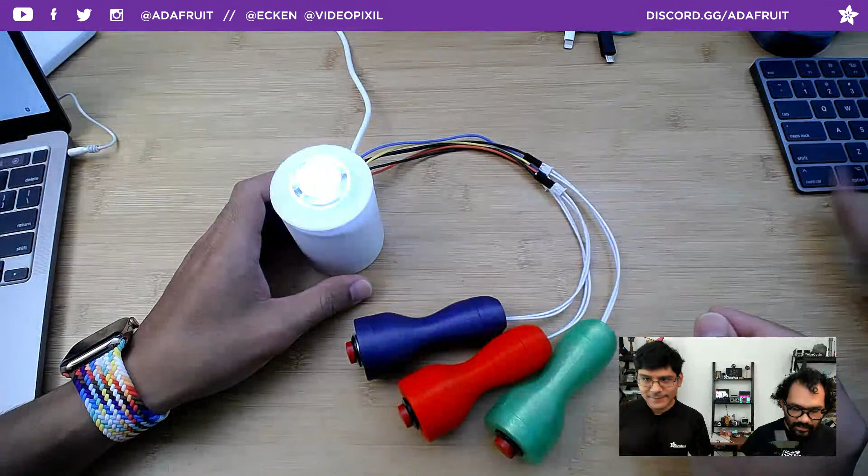And here's the parts. We showed this off a couple weeks now, and finally released last week. We got the guide and the video out, and we're just going to go through the guide as quick as we can on all this. So this is really good for setting up trivia now that everybody can be face-to-face.

A lot of game opportunities now are arising, and this is the Circuit Playground Bluefruit, having all these button inputs so you can see which player chimes in first. It'll just light up to the color of whatever you set up on your little buzzer handle.

All 3D printed, nice little handle that Noe designed for this. This is a 3-part, little twisty on, completely modular, so you can change out any of the panel buttons or the construction itself. Take a look on the inside of this.

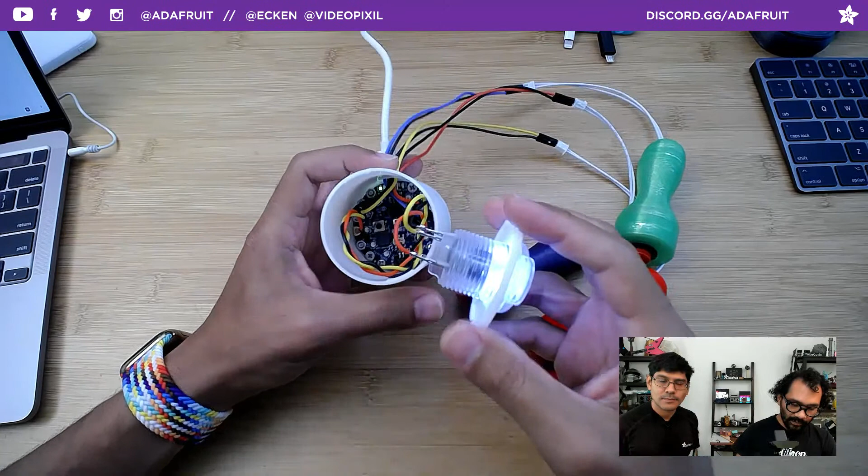There's a Circuit Playground Bluefruit. We're using the bolt-on system, so it's excellent for education if you want to reuse this project for different projects, or reuse the parts for different projects. So all snap-fit together parts.

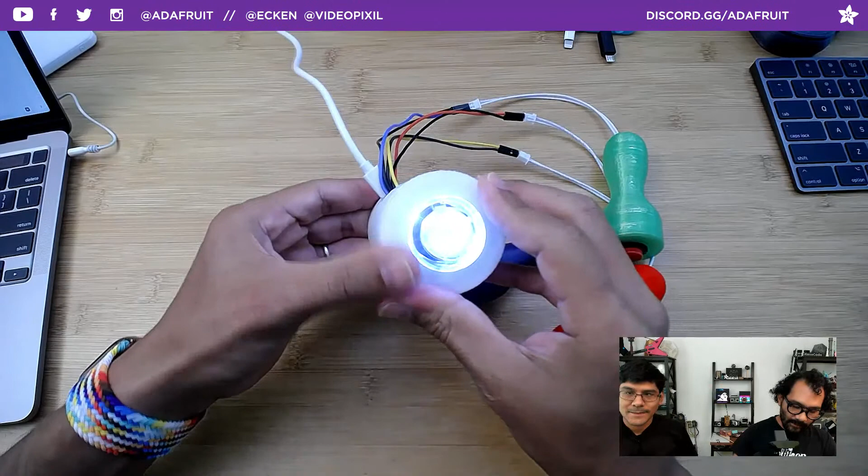These little lids, little tabs here just snap into each other - very nice little satisfying click on that. And then on the bottom here we have our STEMMA speaker with our nice little themed grill to Adafruit, little stars. All snap fits together as well, except for the little mounts that you have to use to sort of secure everything back together.

As we were saying, it's modular, so we're using the bolt-on kit as well as these jumper cables, so you can easily extend this or shorten it if you want to be a little bit closer.

And the way that it works is that the controller, or the host, has to clear the button, so the players can't just go ahead and chime in whenever they want. So you have to clear that and allow them to actually go in and chime. Everything's written in CircuitPython, so of course you can change all the audio files, the colors, or the behavior of everything.

So let's go ahead and jump into the Learn Guide. Yeah, so check it out. Huge shout out to Dylan Herrada for spearheading the project with Lamar - they collaborated together on figuring out how to make this work.

Here's a list of the parts and the 3D printed files that you'll need for this. Like we were saying before, again, it's all completely modular, so it's a very nice way to set up a project like that.

And surprise, everything is in stock for this. Usually isn't - I don't say usually isn't. Well, I mean, it's a good problem to have. It is. Okay, cool. Well, excellent.

Now all the parts are from Adafruit, so including all of the little cables and even the bolt-on kit, it's all available through Adafruit, so that's really nice to see. Normally you have to get all these little bits and bobs from other places, but it's nice that everything's here in the shop.

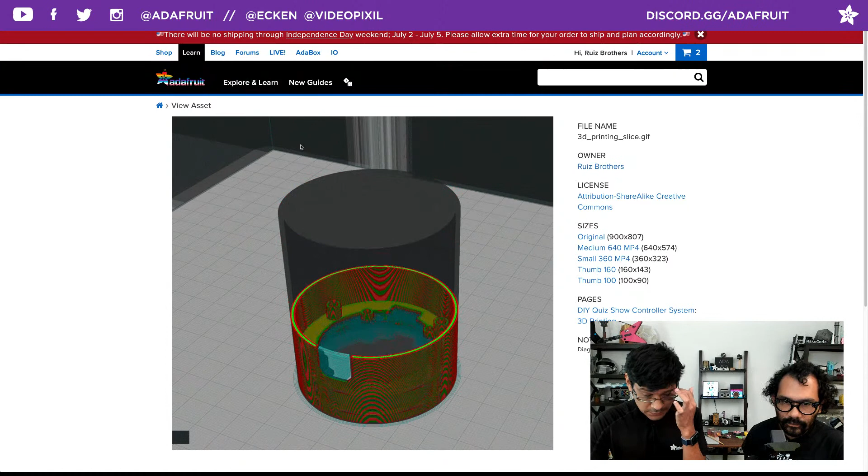This is just a time lapse little GIF. I'm showing when I'm previewing the Learn Guide, I have the autoplay GIFs turned off just to save on processing, but it should automatically play on your end. So this shows you way more than just a single screenshot, like how the layering is supposed to be for the supports.

That's the main thing I'm showing here, how the supports are all set up. You have your low density, a smaller extrusion width, and then a little bit of a Z gap, just to make that very easy to remove.

They are listed right here, all the different support extrusion width, the density. Run through that. If you haven't set up supports yet, this is definitely a good reference point. And then save it as your main profile, and you can save it out as a profile too.

Let's go ahead and jump into the circuit diagram for this. Okay, prototype this using the alligator clips. After that, you can jump into more permanently, or semi-permanently, attaching these with the bolt-on kits, or you can go ahead and solder it too, whatever you like.

The only special thing here is the way that we are connecting the grounds on the arcade button. Scroll up, you can see that that is actually the only thing I soldered, just to have those two connected to make it a little bit easier. Daisy chain all your grounds.

Let's go ahead and jump into the assembly.

So we're using the jumper cables here and flat pliers to have it bent at 90 degrees, so you can easily add it underneath the nuts that come with the bolt-on kit. Those are just wide enough to attach two of them, which you're going to have to do when you're sharing ground for all of these button connections. So you have to do this at least two times, so a little bit of patience.

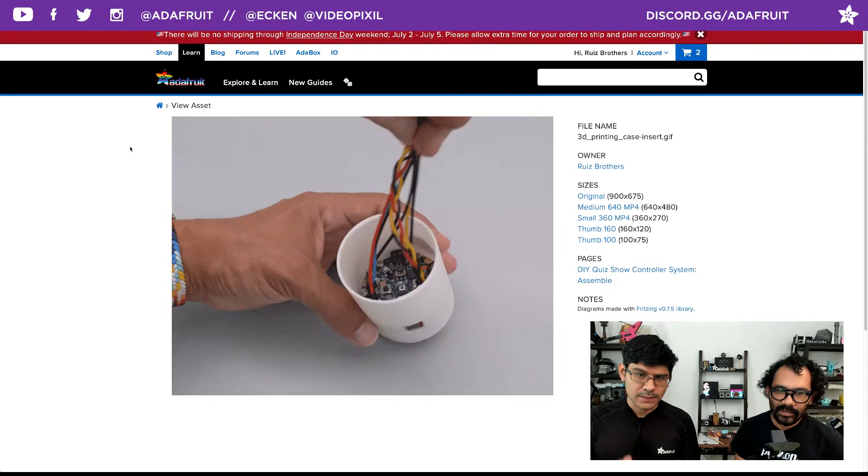Make sure your wires are not too tangled up. I did a little bit of a braid there for the controller, just so I could see which one was for that. So you just want to line up the USB port to the USB cutout on the case, super easy.

Right, so you add those additional screws. And again, that is the 3mm bolt-on kit that we have in the shop.

After you secure that down on the bottom, you'll connect the STEMMA speaker and align that. The STEMMA speaker actually has smaller mounting holes, so you're going to need the M2.5 by 6mm long screws. We do have a nylon kit that might work, but I totally suggest using the metal M2.5 screws for that, that's a good tip.

If you're ever going to do plastic on plastic screws, not maybe the best, definitely metal on plastic is a little bit better and more secure, and it won't strip your plastic screws.

The lid snap fits on there. Of course, you can edit that if you want to have a different lid design for the speaker.

The wires for all the buzzers all route through the USB port cutout, route all those out.

And then the arcade button screws onto the lid. And as we were saying before, we're just connecting the grounds to eliminate one of the cables, making it 3 to connect.

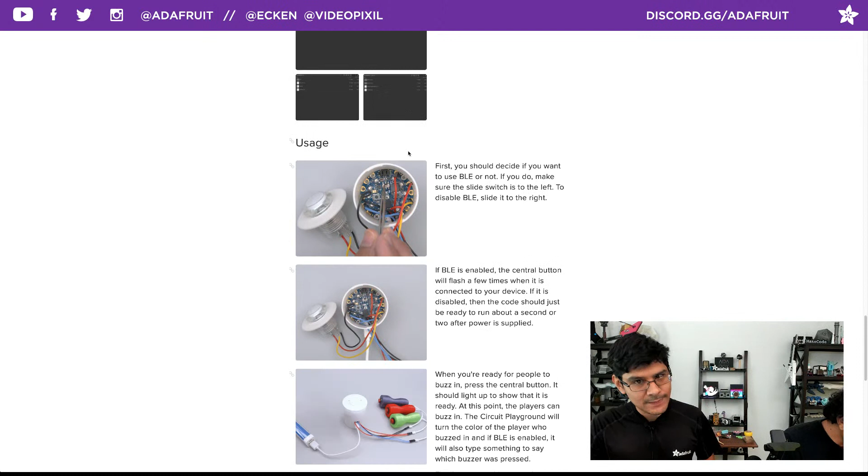So you just click that button, and you get all the files plus code. Very fun, commented really nicely, with screenshots showing what your USB CircuitPython drive should look like with these 4 libraries, plus a little usage guide on the Bluetooth. There's a little switch on there - if you don't want the Bluetooth, make sure the switch is on one position.

If you want to use Bluetooth to do HID USB keystrokes, flip the switch to the other side, and you'll connect to it with an iOS or Android device using the Bluefruit app. One thing we sort of glossed over - this can send HID commands to your computer, so if you have a game with USB HID support, you can actually have this as a wireless controller for your game.

And then in the code walkthrough, Dylan breaks down all the sections, so if you're relatively new to CircuitPython, this gives you an idea of what all the sections are doing - how to enable the speaker, all the button inputs, all the Bluetooth stuff. And here's the audio WAV file - if you want to change the file name or have it looping, you'd do that all here.

A little bit of the logic here. If you want to change the colors to reflect different colors, you'd want to do that in the if statement there. The colors are just raw RGB values using pixels.fill.

But if you wanted to use the CircuitPython LED animation library, you could easily integrate some of the animations so you can do animations instead of just solid colors. We wanted to be pretty minimal, so that's why we have these solid colors, but you can go in there and modify it so it can be super rad with cool colors and different sound effects for each player.

Along with that, we have a model for the RP2040 Trinkey. This is what it looks like. We just took the Eagle file from Limor and turned it into a 3D model with Fusion 360.

If you want the link, Pedro, it's on the GitHub repo. So the GitHub repo has this 3D model. Here's my GitHub repo, so you can check that out. Super visually stunning, I know - look at that huge, visually stunning list of parts.

Yeah, so we got the link for the GitHub? I do not, that's what I'm looking for. GitHub, I was looking for this part actually. If you haven't starred it yet, you can star it so you can see whenever I upload new stuff, and I have some other stuff to share. But yeah, that's the RP2040 Trinkey, got a 3D model out there.

I also made sure that the PCB is the right thickness - it's 2 millimeters, a little bit thicker than your normal 1.6. But anyway, back over to what you're prototyping.

This is an early one, a fun little keypad. It's a 4-button keypad in the shape of a kitty paw, with a display in the center. This is a collab project with Liz, Party Parrots. The idea is that you can press these buttons and advance the animation, which is a sprite sheet animation.

The idea is to make this into a USB/MIDI controller, and you can choose whether you want it to be a MIDI controller to play some music, or a USB controller to do some fun macros. It's powered off of the QT Py RP2040, has USB-C on the back, and snap fit parts with a little kitty on the back. They're all free wired, no custom PCB.

And this is a little TFT display showing the Party Parrot GIF. That's what we'll talk about in next week's show, hopefully with the video as well. But the Learn Guide for this is actually out now, so if you want to know more, check it out - it's live right now. But next week we'll talk all about it. We're out of time for this week.

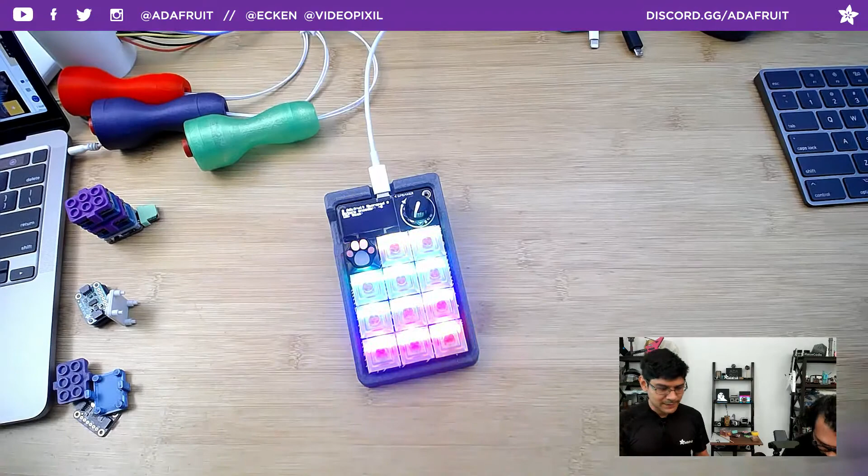We're not done with prototyping. We got another thing, the MacroPad RP2040, just released, very new, very awesome. It's a 3x4 button keypad with a built-in OLED display and a rotary encoder.

This thing's amazing. It's got a couple of different PCBs going on, and what I want to do is make a 3D printed wedge so it'd be at a 14-degree angle, also tying into the built-in standoffs soldered into the PCB. Really, really cool. Just running the demo mode right now.

I don't have anything going on it, but it's really nice. You can add more sensors using the STEMMA QT connector here, and then the reset button right there. So that's really it for that.

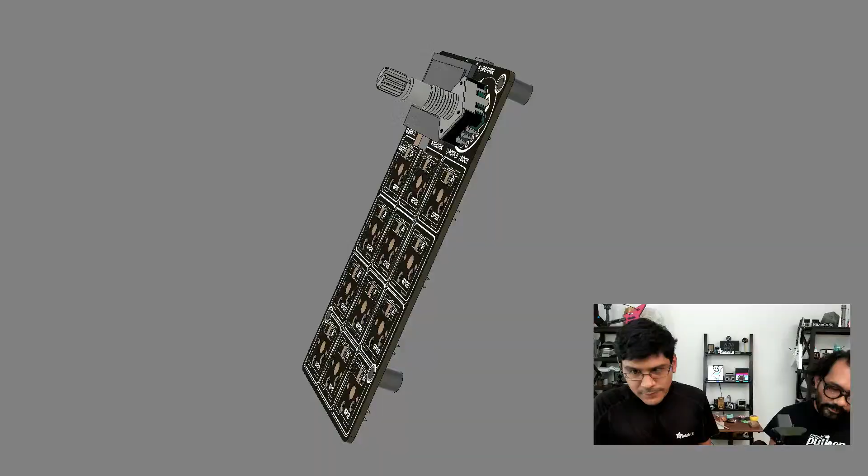We have a CAD model for it as well, so if folks want to start designing cool enclosures or different projects for it, we have two different ones. This is the bare bones - it just has the PCB with the standoffs and the Kailh sockets, but the switches aren't there. It does have the display and the rotary encoder. That's what the bare bones comes with.

If you want the full kit, the starter kit, it comes with the back panel, the back plate, and a key plate that helps stabilize the keys. I also threw in some Cherry MX switches just to show the layering of them all, and some M3 screws in the back that show how they all get screwed together and fastened. The models are available right now on the GitHub repo, so you can check those out.

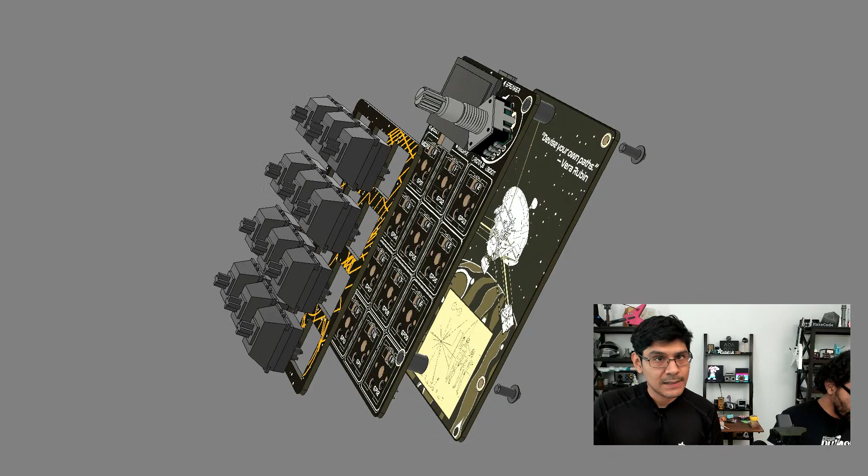Sign up to get notified if you weren't able to get one and you want to get one. You can sign up, they will be back. Limor's working on it - there's a couple stashed away, ready to be released any minute now. So keep that page open, reload it several times. That's what's in the works right now. I'll release this at some point.

I think that's it for prototyping. Let's do a quick layer by layer, if I can get to that. How am I going to do this? Go here, and then here.

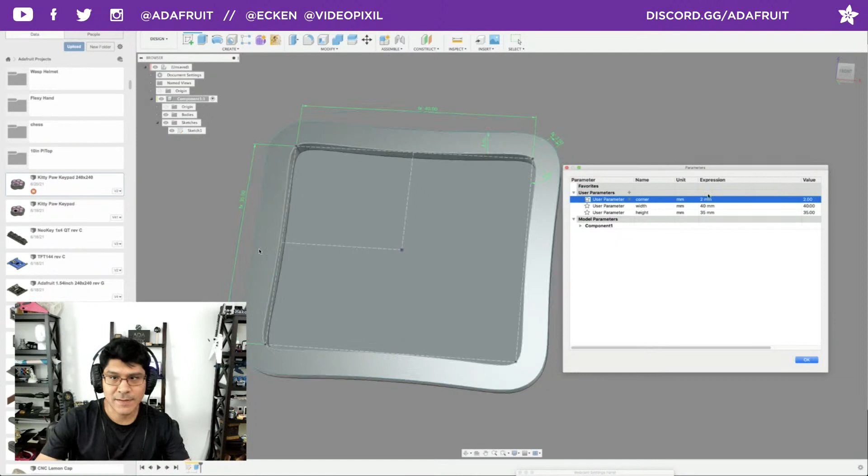If you're interested in some CAD stuff, I got about a 30-minute tutorial on how to make symmetrical designs. This kitty paw thing - I had to learn how to use symmetry in Fusion 360. There's a way to use the symmetry constraints with splines so you can have really curvy shapes. In this example, I'm showing how I have user parameters set up so I can change the curvature of this shape that's all built with splines, and it's symmetric. So when one thing gets affected, the other side gets affected, and you can do symmetry 4 ways like this - the left reflects the right and the top reflects the bottom.

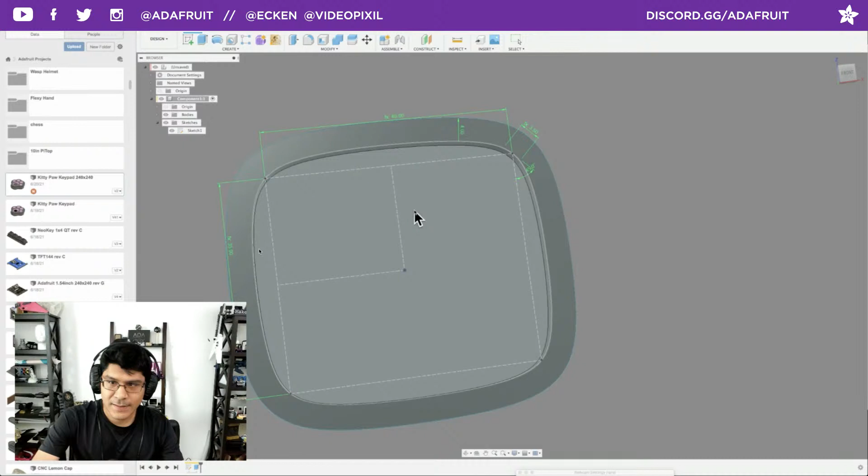This is supposed to be kind of like how I created the bezel for a display. If you're trying to make like a TV, an old school TV with super curvature and bezels, you definitely want to learn how to use the spline tool, and even better, how to drive it parametrically and symmetrically with sketch constraints.

Check it out - not a lot of people checked it out, so it's one of those really niche things. You didn't think you'd need it. I didn't think it either. I went this far without knowing, and that's kind of fun.

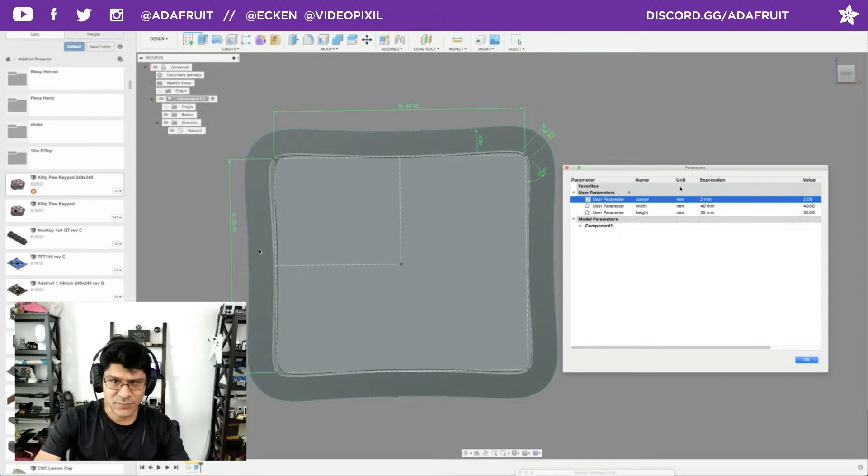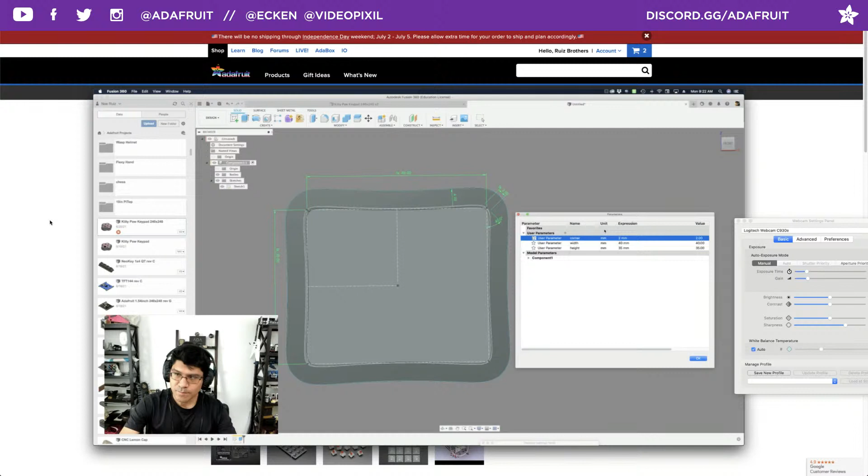The way we did it before was doing it inside of Illustrator, which, when importing that in, you'll have all these dots all over your curves. It's like, why don't you just copy and paste the other side? Well, it has to be a closed spline, and I had to really massage this shape to get the proportions right for this kitty paw. I went all out trying to get the shape to be proportionally accurate - accurate to what?

I don't know, but to the shape you want. To the shape I want, yeah. So I don't know, check it out. Well, specifically to the shape of the inside of the TFT there.

I really needed to have this whole shape done in Fusion, because in any other app, when you import a vector and try to do sweeps or do something else with the paths, normally they're not optimized for Fusion, or even for milling or anything like that. So that's why I like doing everything there. This really helped me get a handle on splines and Bezier curves. That's the keyword, optimization, because otherwise you'll have points all over that aren't needed.

Such a ridiculous way to learn good tips.

I love it. Looking over the chat on Discord, Brent is asking, does the case snap onto a standard keyboard? Which case, the MacroPad? I didn't really design it to do that, but we could design it to do that. Let me know what kind of keyboard you'd like it to snap into and see if that might be an option. Like onto the side of a keyboard, so it could be an extension, like a number pad. I didn't think of that, but that'd be cool. I was thinking of adding some other corner bits here so you can add some rubber feet.

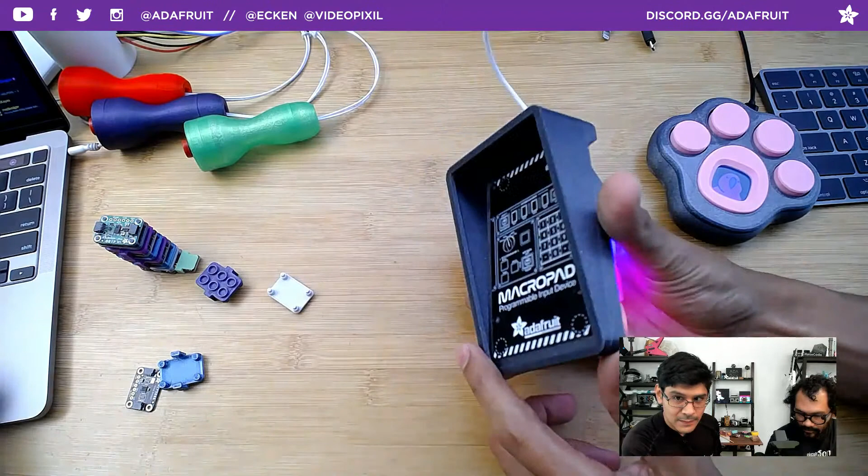Yeah, I think that might be a cool thing. It's just prototyping, right, so I'm not done with it yet. Or maybe like a NinjaFlex that just goes all the way around. Yeah, I was thinking that too, but feet might be easier. Might be able to do feet.

This has weight to it. Have you held this in your hand? Yeah, I don't know, it's heavy. It's like the PCB, and it's kind of right, it is the PCB and all the keys, but this is fairly thin. Like this is 1.5 millimeter thin, and then this right here is a little bit thicker, with a bit of a ledge here, so that it has more.

But look at that, look at the way it's inclining here. Let me see if I can do this. Hold that right there for me while I do the focus. All right, now look at this, you can kind of see the steps there, the way it was printed. This is actually the bottom side that gets printed. Pretty good resolution, right, the stepping of it. I don't know why I showed that, but that's cool.

Brent's clarifying, he wants to place the numpad in the middle of his split keyboard. Show me what split keyboard you have. He has the Kinesis Freestyle 2.

Okay, so it's this guy here. That is so cute, there's this split keyboard. Looks like you might be able to have some kind of wedge or something that can go in there. That's cool, nice. Maybe it can clip on underneath where the little risers are, the feet for the keyboard.

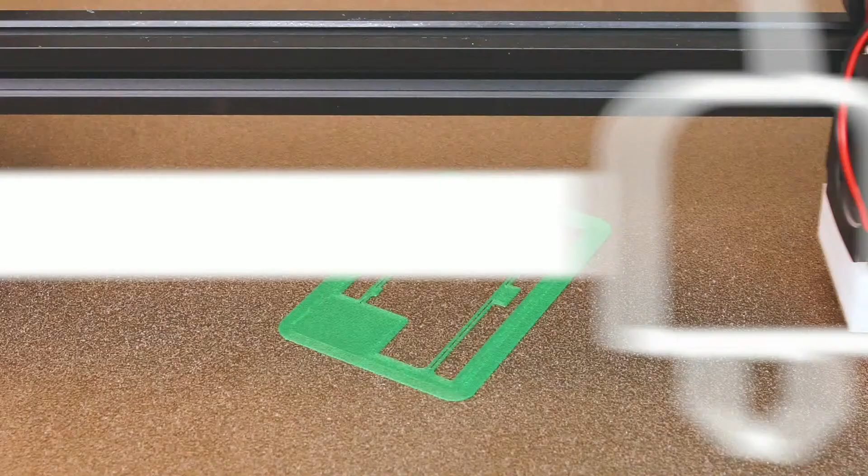All right, let's go ahead and move on to this week's Community Makes. Every week on Tuesday, we try to 3D print something from the community and do a time lapse about it, and then show it on the show. So last week, sorry, the micro catapult, super fun for the office as you return back. Use this to annoy your coworkers or launch, I don't know, candy or something at them. Done.

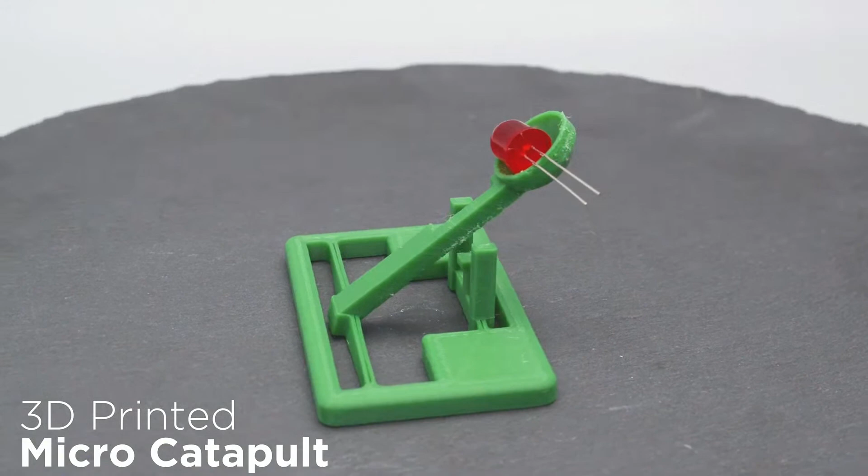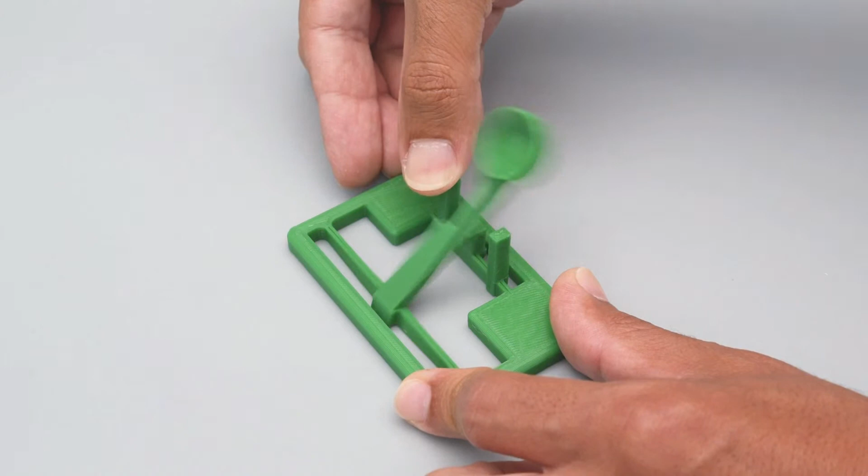You know how it is, having the office antics. So here we're just using some LEDs. I haven't been in office in quite a few years. No, I'm laughing at what we're using here to catapult. Oh yeah, I definitely don't use LEDs, you'll poke someone's eye out. This is all we had. I'm gonna suggest using candy or something.

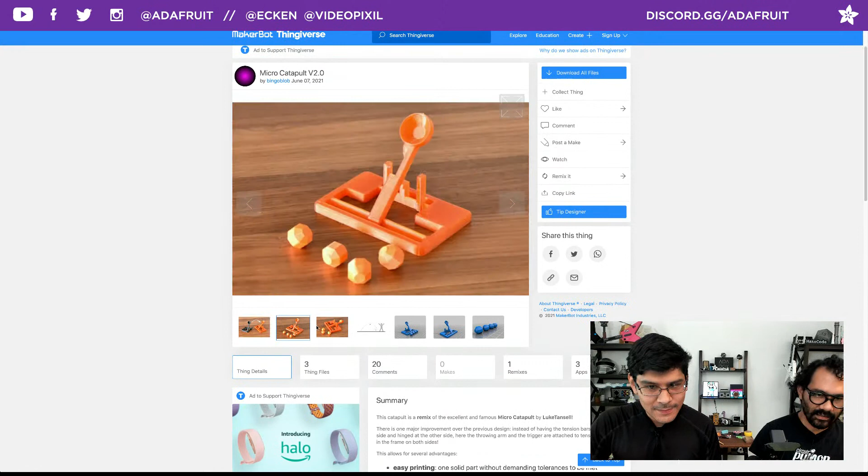But this is a remix design, is that correct? Yeah, this is a remix design. Bingo Blob put this up here, and he made it ambidextrous. Look at this little chart - V1 when he goes this far, V2 goes that far. Super technical. You can also 3D print the little balls, right? Again, candy. Easy printing, one solid part, very cool. The original design is from this fellow here, so you can check that out.

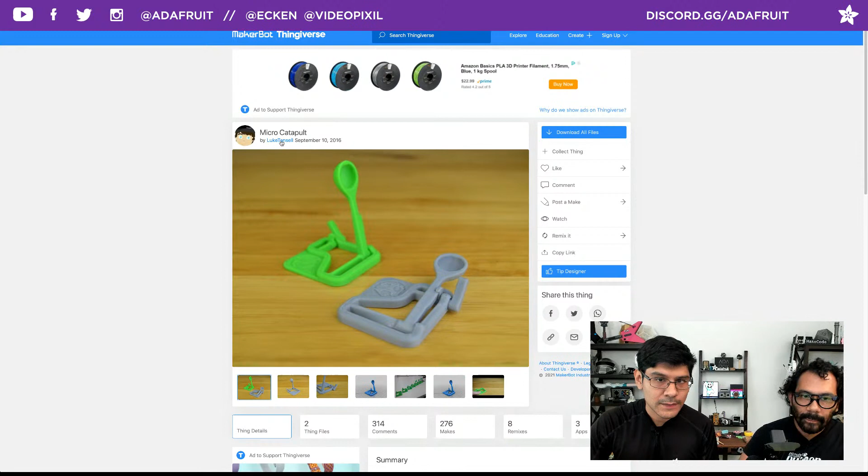So what's so cool about this is the spring or whatever that is being used to act as the mechanism that'll launch. Luke Tansell is the original designer, remixed by Bingo Blob. So let's take a look in the overhead.

So this little thin piece of PLA here is what's providing the spring action for it. One tip though, for anything that's printed in PLA and you're using any springs - one of the torture things, one of the boxes that had like a spring open part, I had to completely throw away because if you leave it latched in like that, the PLA is going to sort of mold over time into that, and then the spring won't work anymore. So that's what happened there. So just some things to watch out for with PLA.

Of course, this won't work with PETG, I don't think. But there you go, it's a built-in little micro catapult. The spring action here going on. It's a nice little - it takes like, what was it, like 2 hours to print. Print in place, very cool. Good torture test too for your printer with the angles.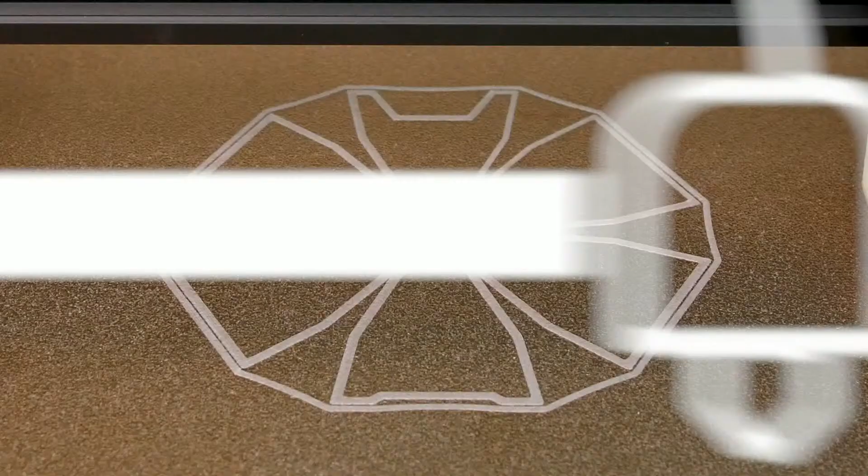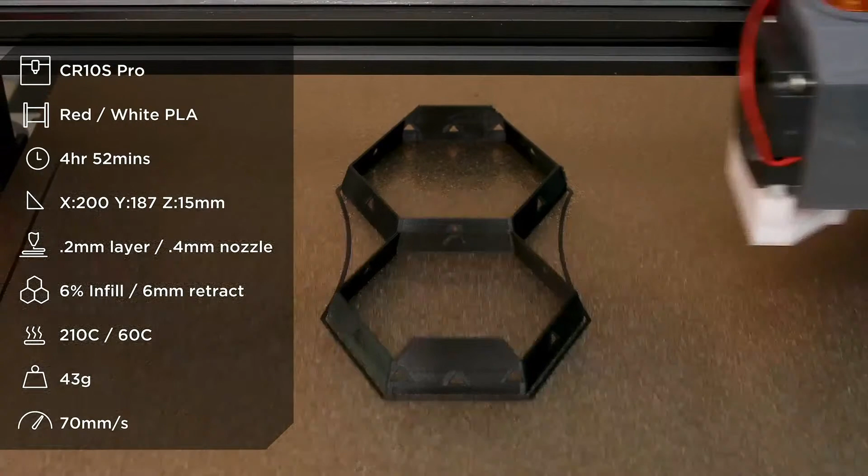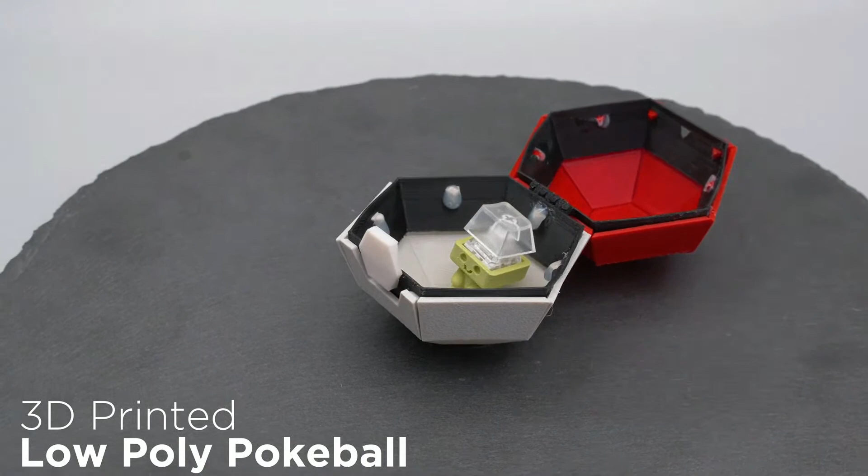Crazy, okay cool. And then this week's Timelapse Tuesday was this Lowpoly Pokeball by 3D Mon. I was going to call it the origami style - that's what interested me so much about this. The included printed-in-place hinge, and then everything needs to be folded together to form the domes for each side. So if we take a look at the overhead here, you can see how this is all bent. It prints in one flat piece, and then you just bend these to create the dome for each half. And we have our printed place hinge there, and then this little guy here clips onto the little hole there.

Yeah, that's very cool. And then what, it's hot glue to secure those tabs? Yeah, you can use hot glue for these. It's supposed to click in, but my tolerances are off. So some glue may be required. That's fine. If your tolerance is a little bit better than these, it should just snap in.

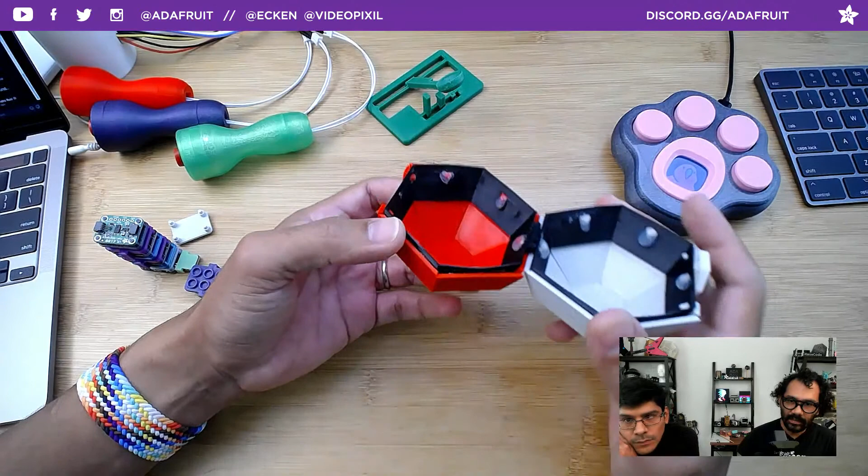I don't know what's up with the resurgence of Pokemon. I think you were saying because of new seasons out, you have the new game. It's on Netflix, there's like a 2021 cartoon out. And of course, obviously, the kid is - Gavin's super into Pokemon right now. He had a Pokemon-themed birthday. Super cute. So of course, we had to start doing some Pokemon stuff.

So there we go. And this was just released as well. Pretty cool use of doing origami, doing the hinge. So shout out to 3D Mon. The way it snap fits together. It's a free download off Cults 3D, so you can check it out. And it doubles as a great ornament, so get your Christmas gear ready. Very, very cool Pokeball - gotta print them all, Pokeball. Very fun. So thank you, 3D Mon.

All right, and then we have some other community makes from the community. So let me run through those now. First up, we got a make from John Gallagher on Twitter. He tagged us. He made the Infinity Mirror Coaster project. So here's John showing it off. He is a professor in the Boston area. Shout out to him, he's been on Show and Tell. He's a frequent Show and Teller.

Wish he was my professor. Right? It was so cool. But yeah, he's showing this off. He's going to use this as a way to teach his students how to make some fun stuff. Very cool, let's just let that one slip.

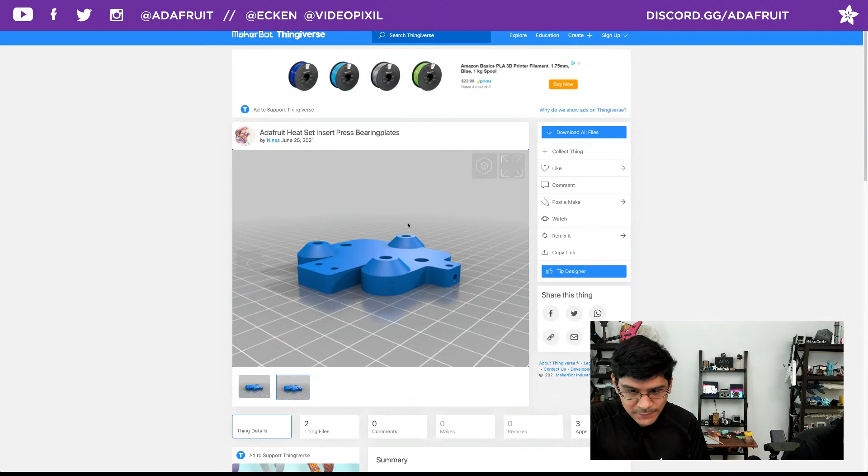Super cool. All right, some more stuff here. We got a kind of remix of the Heatset Insert. If you're looking for a way to do Heatset inserts into 3D printed parts, we have a device that helps you do really smooth, linear Heatset inserts. So this fellow here found an issue with the kind of bearing plate and remixed it so that it fits a different setup.

That's really cool to see other folks remixing it. The files are all open source, and they can download it in different file formats, and that's what I like to see, folks making it work for their setup. So that's really, really cool. Here's the original kind of design there. This was a collab project with Bill Binko, so shout out to Bill Binko for that one.

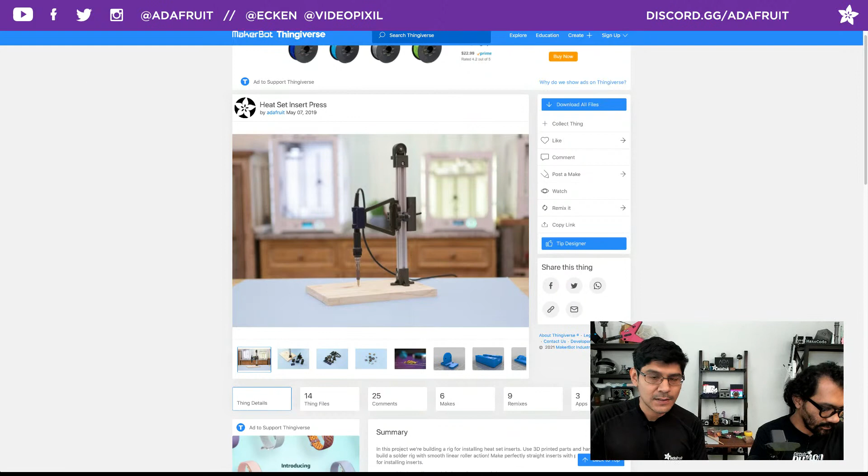This is one of the kind of rigs that we needed for our own personal use. And these are the Heatset inserts. We even sell these Heatset inserts. Quick plug, they are in stock, they are indeed in stock. So if you're doing a lot of them, that's really why, and you can damage your part if you do it incorrectly. That's why I really needed to make this, and Bill Binko and our brains just kind of were working on the same thing.

Is it a Catapult? It's a crazy Catapult. Yeah, so cool. Heatset insert rig, it's out there.

And we got one last one here, or actually second to the last one, this is Mario Boo. This is a make by Pat6046 on Thingiverse. I got a lot of makes on this one, right? It's a little planter, no electronics, but very fun, a little planter modeled after the iconic Boo from the Mario video game series. Yeah, you can add electronics to it, make it glow.

And I just read the description there. Wow, primer fill and acrylic paint, that's why it's so smooth. It's super smooth, y'all. Holy crap, this is a good one for practicing your smoothing techniques, right? Yeah, why not? Very, very excellent.

This is Tim C, Foamy Guy, better known as Foamy Guy, has a really cool project on the Learn Guide that isn't released yet. Sorry, I'm sneak peeking this, but using the 3D printed in place crank for the rotary encoder. It's using the Adafruit rotary Trinkey, and it's a way to create a brightness crank. It's got some really fun things where you have to actually crank it a little bit harder to actually get your thing to work.

Very, very cool project. Can't wait to see this released, but I figured I'd show it, just a preview here in the Learn Guide. It's in moderation, yeah, it'll be out later today, I hope. And he has a nice little explanation why he's using the crank to keep the brightness up. So when you're scrolling through social media, you have to work for it. Yeah, very, very cool.

I think that's it for this show. We're a little rusty because of last week, but hey, we'll be here next week. There's still stuff going on, but we're getting through it. Looks like probably at the end of the summer we'll be back to weekly. We have a floor now, that's really nice. It's been nice to walk around in it and spend some time with the kids down there. We've got a bunch of lighting going in, a bunch of fans going in.